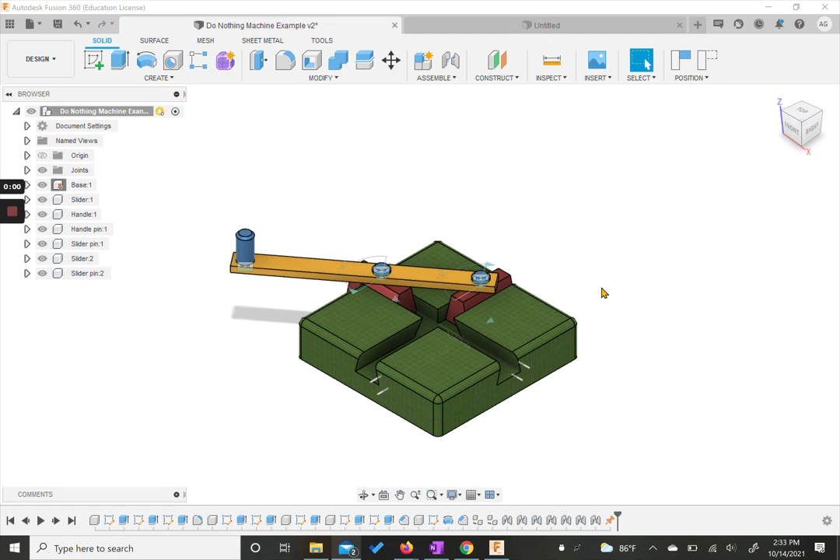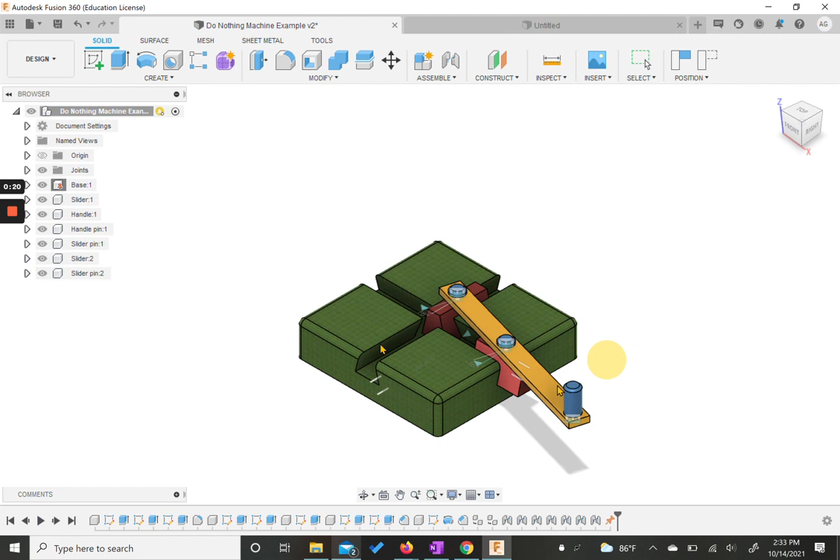Hi everyone! For today we are going to start a project called the Do Nothing Machine, where we have an assembly, which will actually be our first assembly in Fusion 360. As you can see, there are multiple parts and we have relationships between those parts to create certain types of motion. So we're going to start by creating all the shapes, then putting it all together, and then making sure we can constrain it or use joints in specific ways to get our motion.

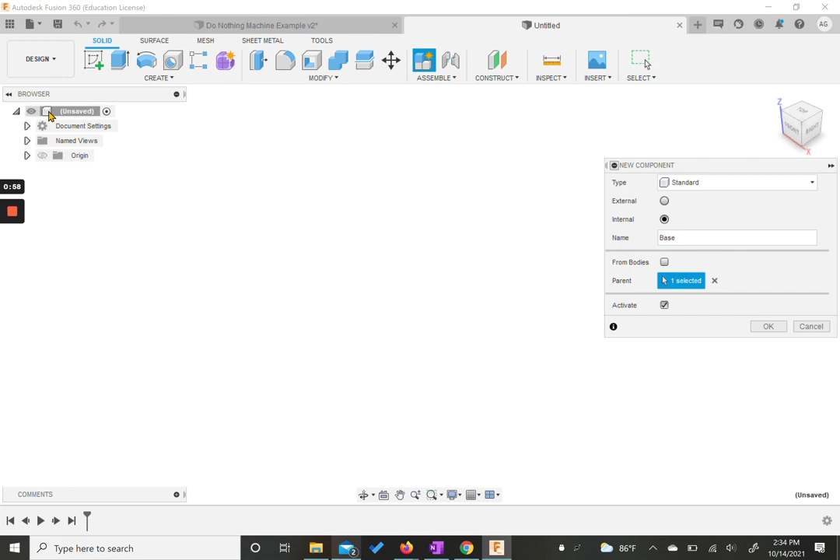All right, let's get started. I've got a new file open right here. We're making sure we're in our design workspace, and we're going to start by creating our base. So I'm going to create a component. Our components are going to be very important for this activity. We want to make sure our components are labeled and that our parent is always the entire document. I'm going to hit OK. It's going to activate our new component, our base.

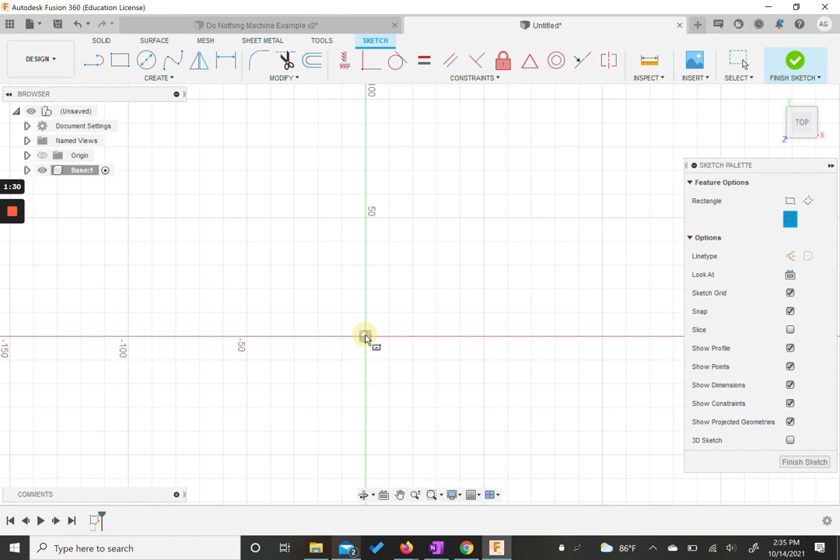I'm going to create a sketch. For this sketch, we want it to be on the XZ plane, or the top, which is this one down here. If we choose it, we're going to create our base shape, basically a square. We can use a new kind of rectangle we haven't used yet, the center rectangle. It's kind of like the circle tool, where it'll let you place the center and then measure both sides. Both sides need to be 150, so I'm going to hit 150, tab, 150, and hit enter, and zoom out a little bit.

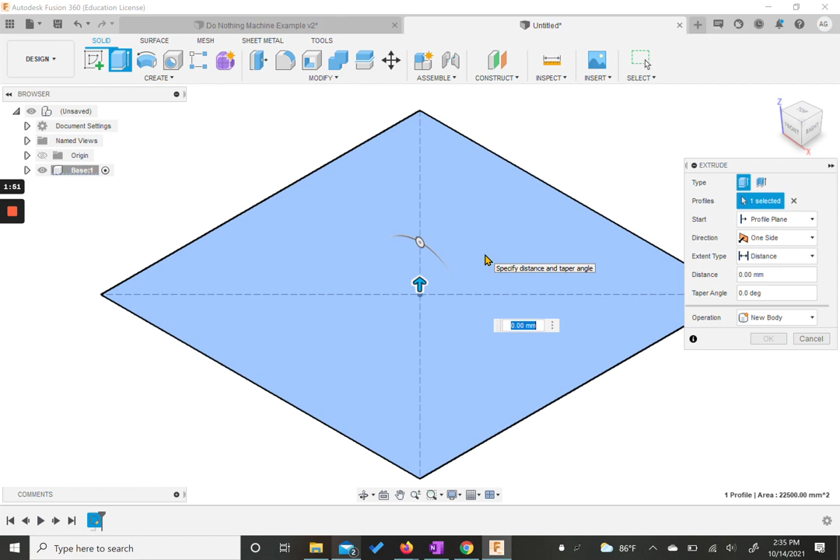I'm actually going to finish the sketch, so I'm going to move to home view again. We're going to extrude this to 35 millimeters, so we have this nice block.

We want to cut some grooves out of it. So I'm going to start a sketch, and I'm going to choose one of the sides of our box. Either way works, because we're going to need to do both. There's a few different ways to make the groove that we need to take out of this. I'm going to make mine separate and then move it to where it needs to go, just so you can see it a little easier.

So I'm going to choose my line tool, and I'm just going to make the general shape that we need. What I've done is I've taken the line tool and used it to make two horizontal lines, the top and the bottom, and two diagonal lines in between.

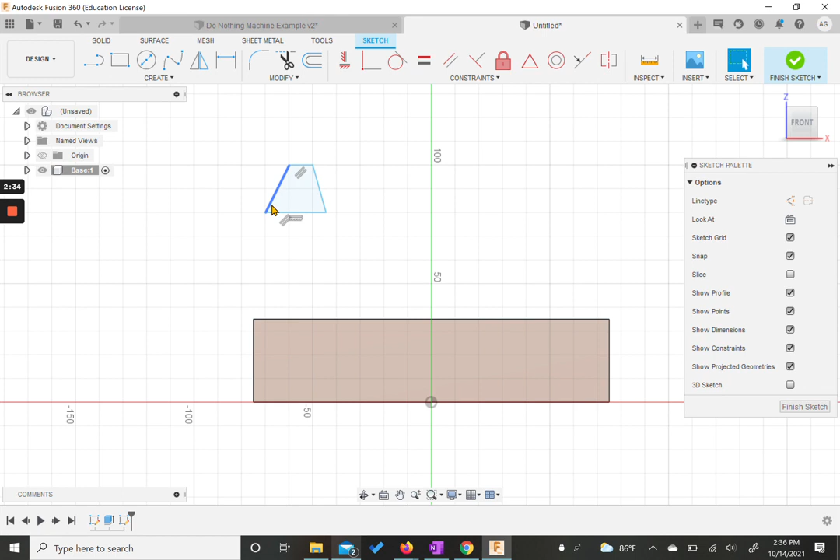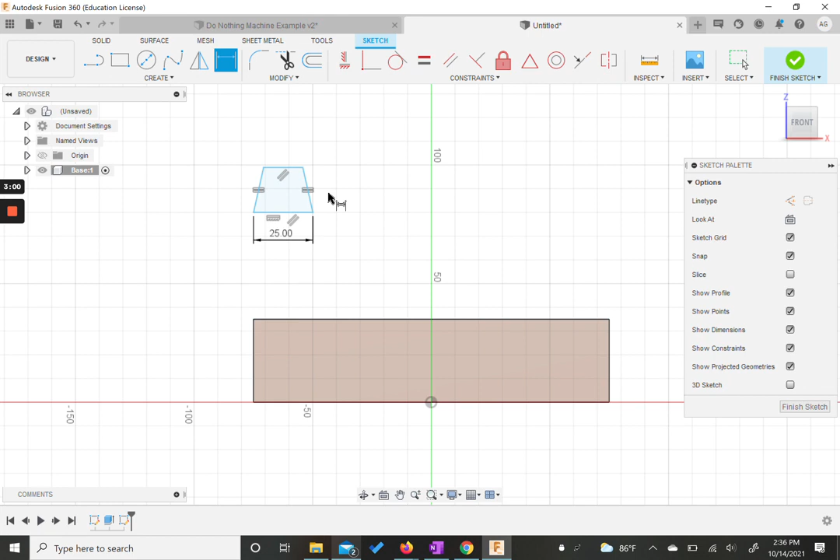We need to use some constraints to make sure this is modeled correctly. I'm going to use the equals constraint to put equals on both of these sides, and then we're going to need some dimensional constraints to create the sizes. This bottom line is going to be 25 millimeters. From top to bottom is going to be 17.5. And the angle between the bottom and a side, either one, is going to be 76 degrees.

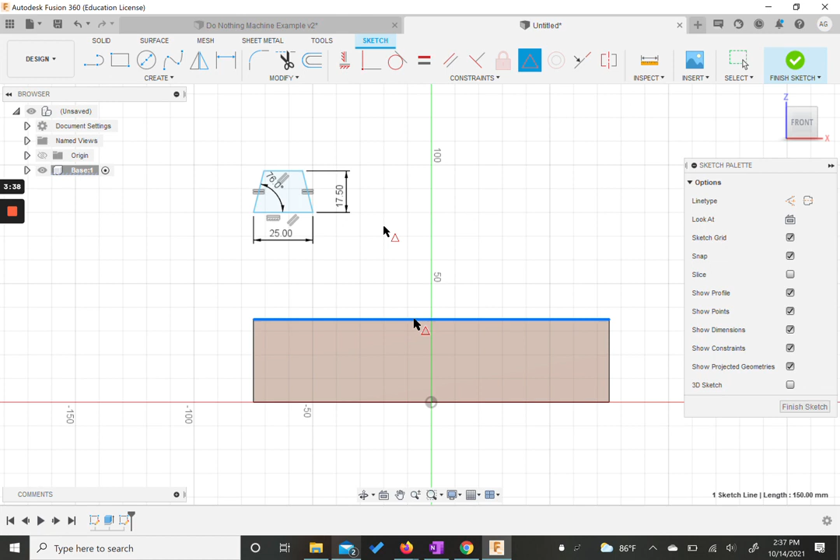At this point we have our shape. We need to put this in the center of this line. So what we can use is the midpoint constraint up here. If you choose midpoint, we're going to choose the top line of our box and the top line of our trapezoid. This snaps the centers together, and we can finish our sketch.

I'm going to choose our home view again so we can see it a little clearer. We're going to extrude this throughout the entire shape. You can click and drag, or you could click and change it to cut and change the distance to all. Either way works for this point, but best practice would be for all, so that just in case we change the sizes, it would still change to the design intent that we had. All right, we're going to hit OK.

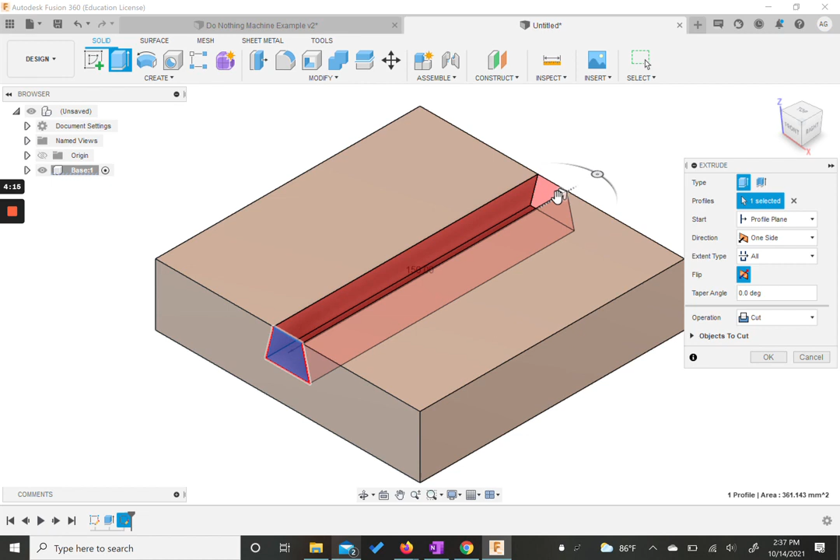Now we need to do the same thing on this side here. So I'm going to start a sketch on that side. We're going to use our line tool to make our little trapezoid-ish shape. This time I didn't make the top and the bottom parallel to each other, so I'm going to add a parallel constraint between these two. I'm going to add my equals constraint between the two diagonal sides, then add my dimensions.

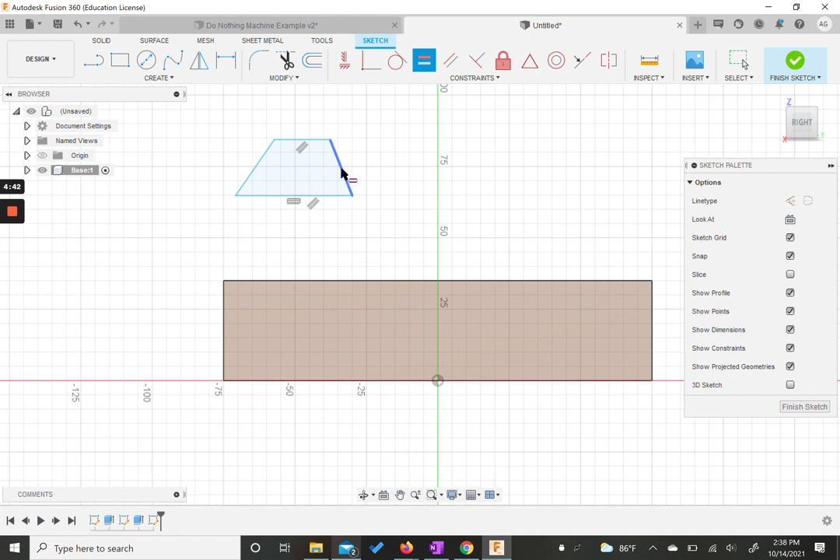So the bottom one was 25 millimeters. Yes, 25 millimeters. Our top to our bottom was 17.5.

Somehow we have a lot of extra numbers here. 17.5. There we go. All right, and if you've noticed, we have a little bit of an issue.

If you notice, these started to change angles before we add the other dimension. I'm going to drag this a little bit so that when I add my angular dimension, it doesn't accidentally snap to the opposite side. So now I'm going to add in a dimension between our bottom and our edge. That was 76 degrees.

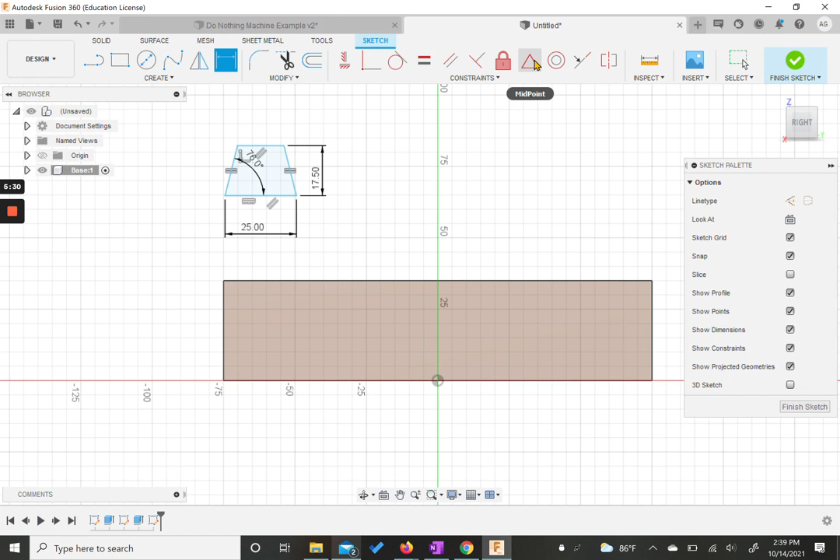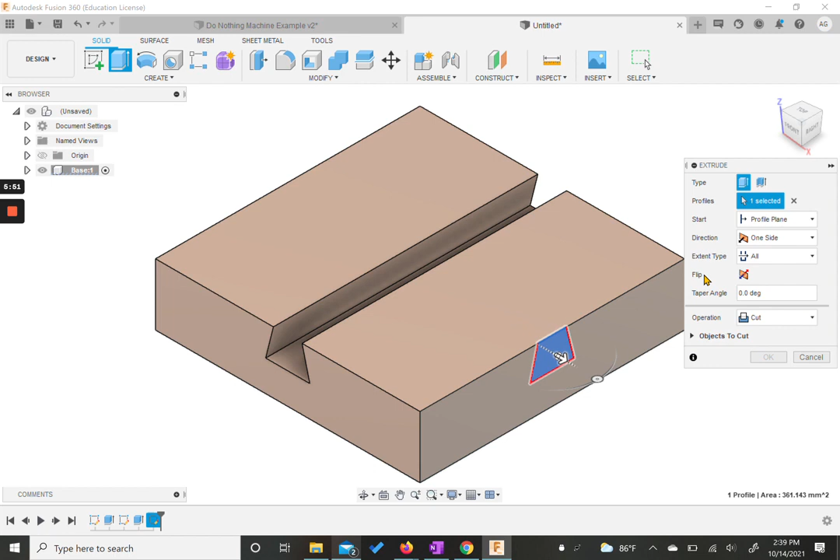Now we're going to again do the midpoint constraint, click on our top, and finish. All right, we can extrude, choose our area or our profile. We're going to change it from distance to all. We're going to say we're going to cut, and change our direction by this little flip button, and that's a little more accurate for what we want to do. So we're going to hit OK.

Now if you remember from the original one I showed you all, there is a fillet, like a curve, on many of these outer corners. So we're going to choose in our modify panel the fillet tool. We're going to choose each of these little edges all the way around your shape. And then we're also going to choose the vertical corners as well. This is going to be a 5mm radius fillet.

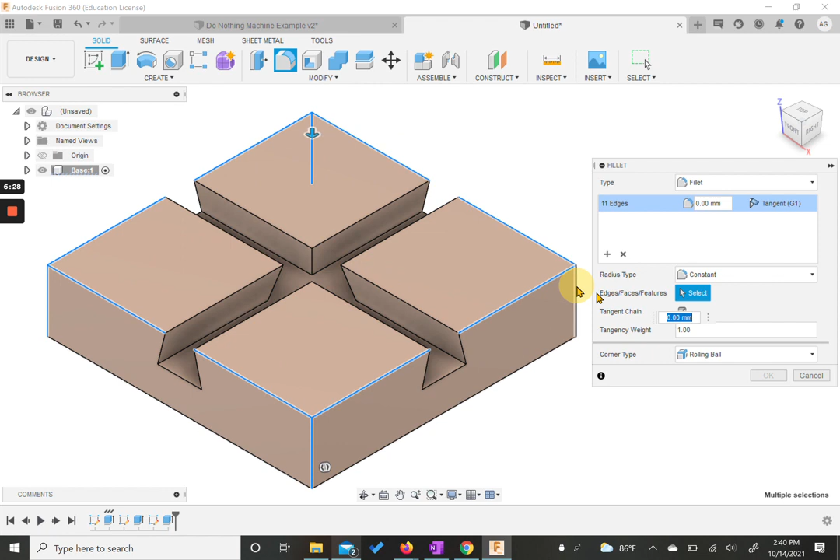All right, here's our base. Now what we're going to need to do is create a new component and start our next shape. So to do so, we're going to create our new component, but if you notice, it's trying to add our base as the parent, and we don't want that.

So we have two ways we could do this. Before we clicked on new component, we could have clicked on the top level in our browser, or we can click the little X that was over here by the parent and choose it now, and now hit OK.

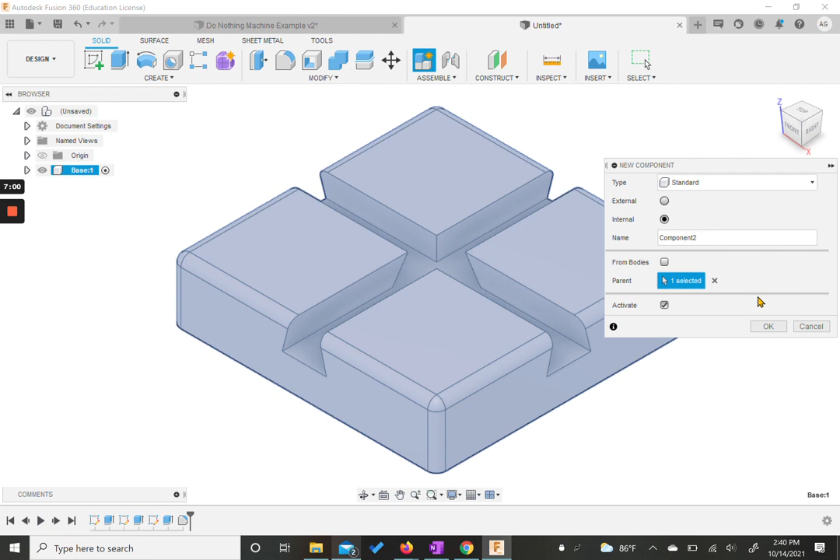If you didn't name it, like I just forgot to, we're going to go to our properties for our component, and we're going to rename this. This one's going to be the slider. All right, I'm going to change it on both.

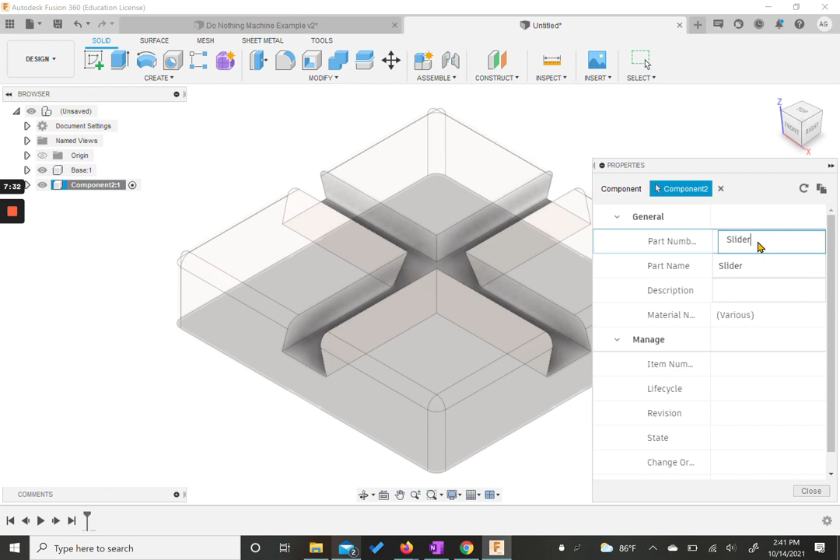And close. All right. There's a few ways we can do this. For this one, I'm going to show you how to make them separated in the same document, and then we'll put them together. For future shapes we can make it directly attached to our object as well.

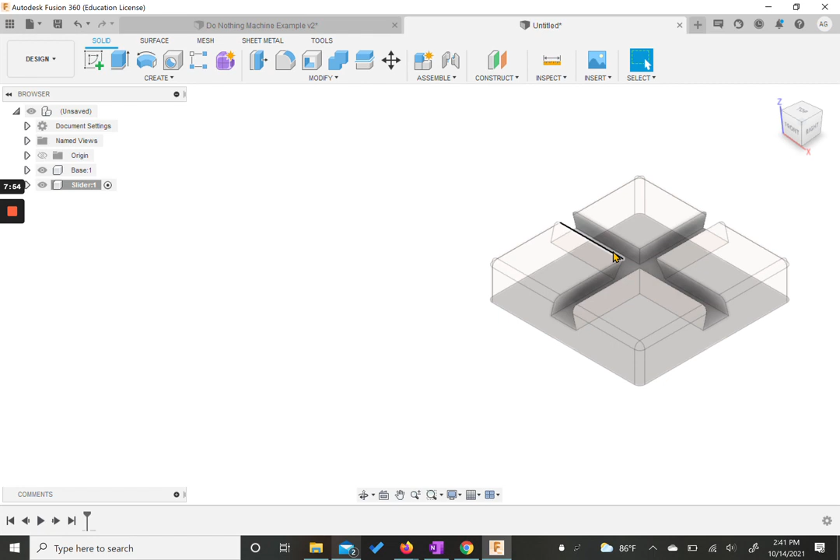Actually, before we do that, I want to do one more thing. I'm actually going to right click on base here and ground it right now. Grounding will come in really handy a little later. I'll show you why, but for now, we're just going to right click in there, ground it.

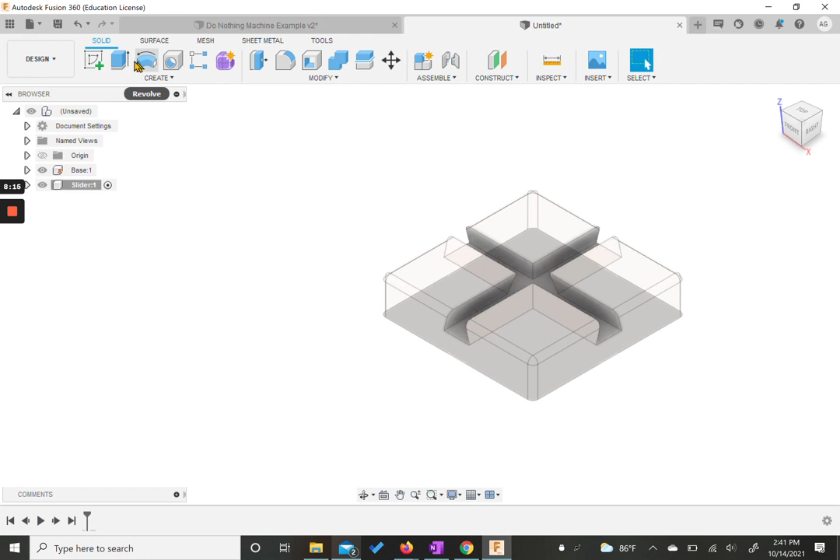Okay, I'm going to create a sketch. This sketch I'm going to create on our front plane, the XZ plane. Like I said before, we could move it, we could create a shape out here. We could technically use the lines we already have as well.

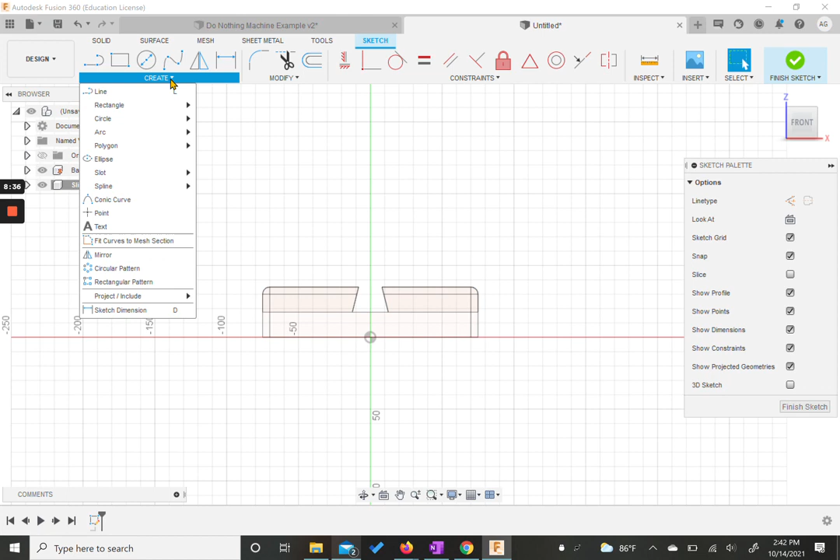So I'm going to show you the actual projection version of this right now. I'm going to hit create, and project and include. I want to choose the project option, and I'm just going to project the kind of trapezoidal shape that we had from before, at least part of it. Okay, I'm going to hit OK.

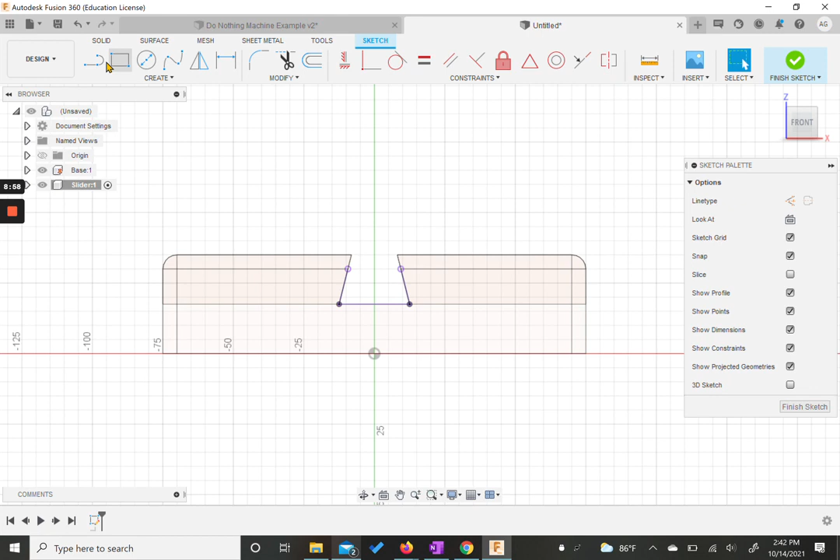So the shape that we're going to make is a taller trapezoid. Now we can grab our line tool. I'm just going to make this a little longer, come across, and come down across the side. If you notice, this one on the edge here is not quite right. We're not quite at the right angle, but we can...

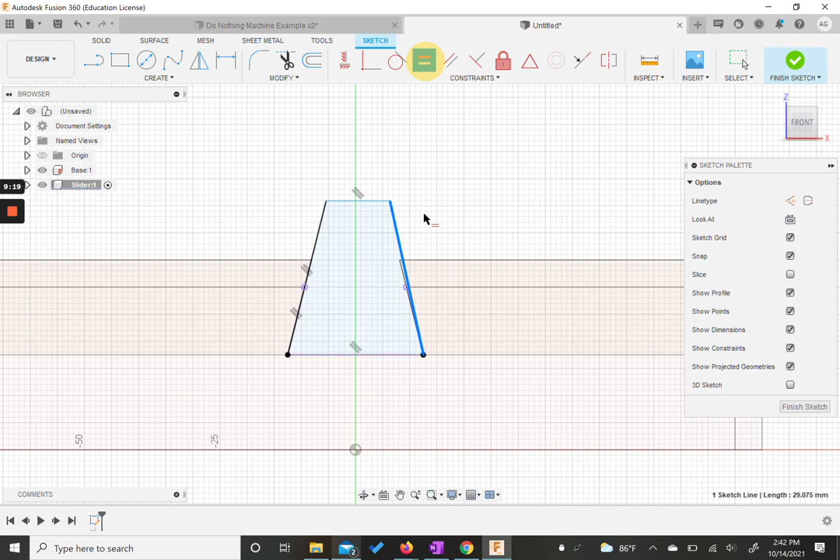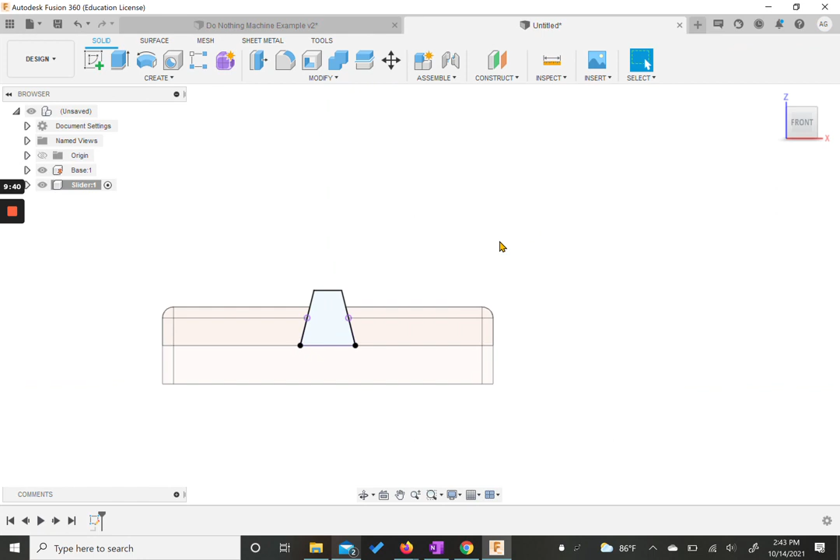We can make these equal to each other, and that will snap. We want our sketch dimension, we want our top to our bottom to be 25, and that's our sketch. We could have created our trapezoid over on the side like we did before, but again, there are a couple different ways to do lots of things.

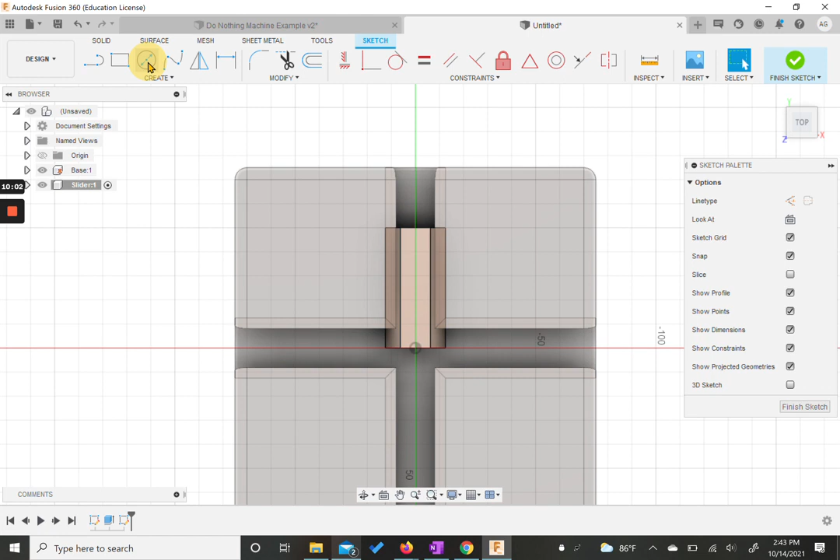So right now, we are going to extrude this to 50 millimeters. So we have this little wedge, and we want to make a sketch on the top, and we're going to make a circle directly in the middle. So if we put our cursor towards the end, we can see, oops, I clicked a little early. We can see that it brings these dotted lines. If we do the same thing on the side here, it'll bring a dotted line across. Okay, so we need to do it in both directions so that it's directly in the middle.

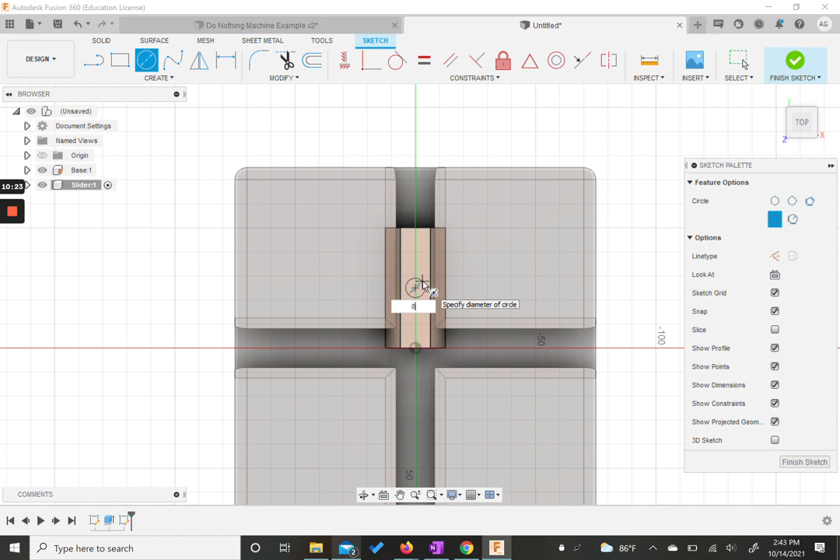And this is an 8mm circle. And we're going to extrude it down. We're going to cut. And this is going to be 20mm.

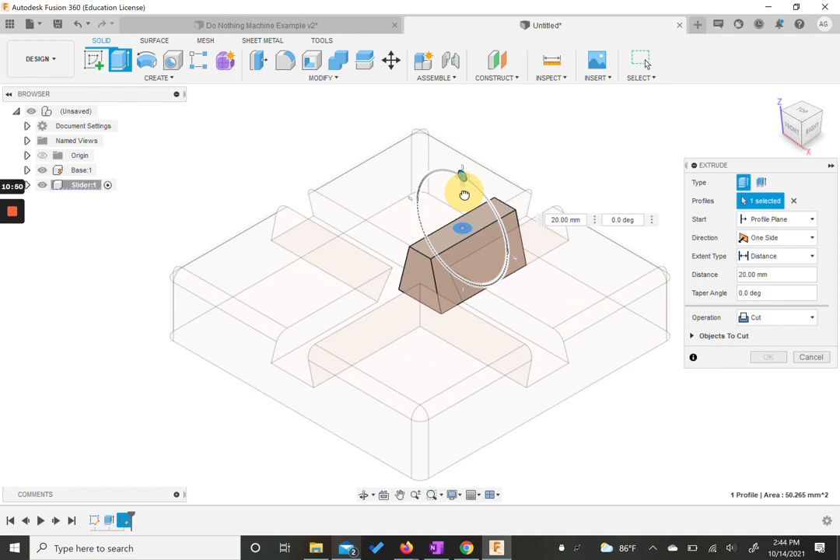And if it's not doing in the right direction, we can switch. Oops, it's not giving me my flip direction. Well then we're gonna... oops, go -180. If I could type. Oh, not taper angle. Oh, I grabbed the wrong thing. We're gonna cancel that. That's on me. It did not go nearly as well as I'd hoped.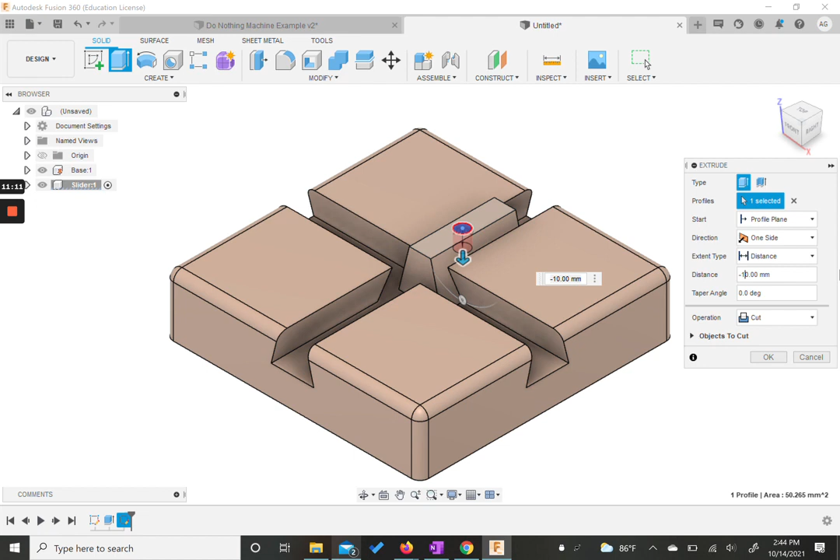All right, -10 will work. We could have also used the hole tool and just done a simple hole on the top there. There are multiple ways to do a lot of the things that we're doing.

All right, and for here, we're actually going to pause at this point, and we will create the other shapes in a separate video.